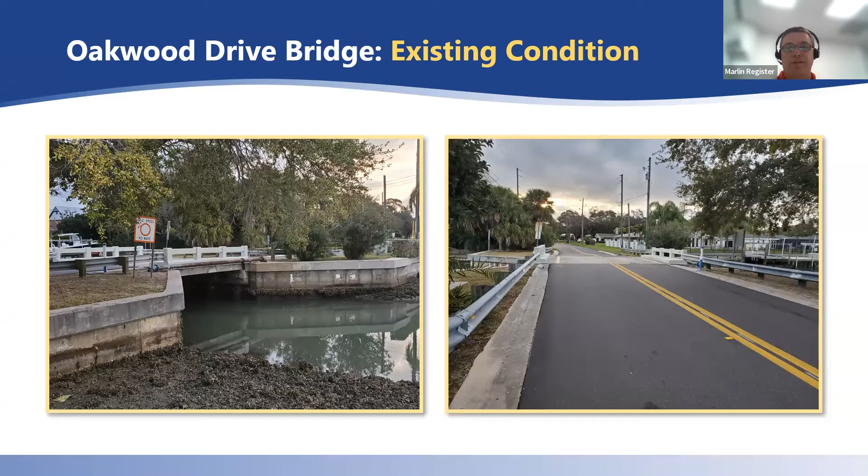Welcome to our virtual neighborhood public information meeting for the Oakwood Drive Bridge Replacement project. My name is Marlin Register, and I'm the engineer of record for the project. The existing Oakwood Drive Bridge is a single-span bridge over Stephanie's Channel. The existing bridge has two 11-foot lanes with no shoulders. There is an existing 2-foot 10.5-inch wide sidewalk on the south side of the bridge.

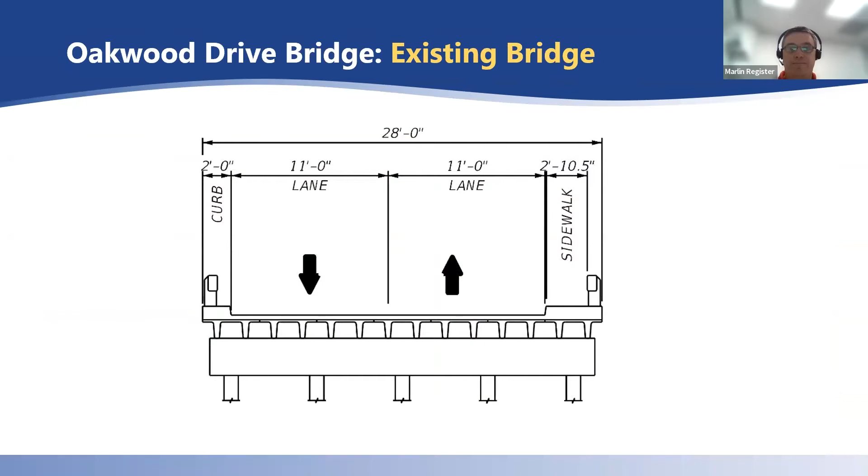Construction of the new bridge will require temporary and permanent relocation of the water, sanitary sewer, and gas lines. This work will be coordinated with the utility owners and performed during construction.

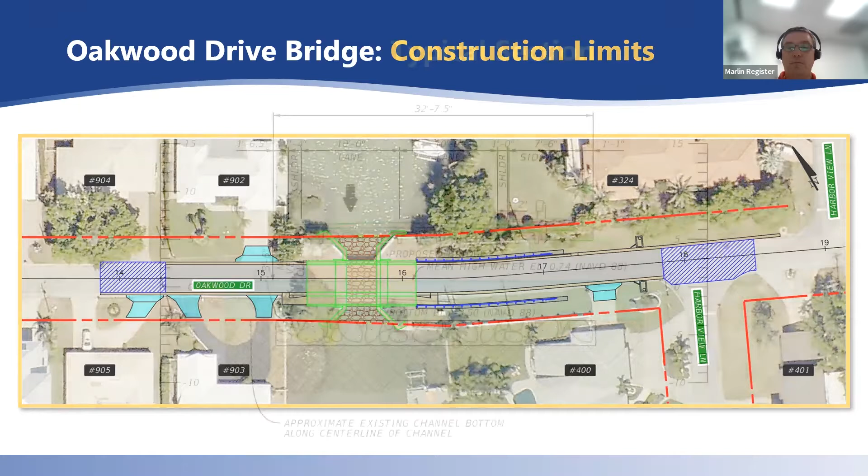The new Oakwood Drive Bridge will be wider than the existing bridge. The new bridge will have two 10-foot travel lanes, a 1-foot 4-inch shoulder on the north side, and a 1-foot shoulder on the south. A 7-foot 6-inch sidewalk will be included on the south side of the new bridge. The bridge low member elevation will be raised by approximately 2 inches, providing a clearance of 3 feet 6 inches underneath the bridge.

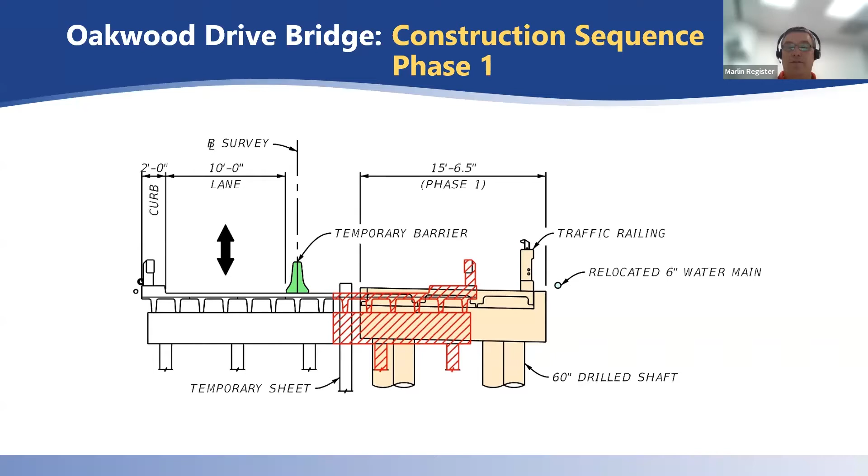In the first phase of construction, temporary barriers are placed closing the southern half of the bridge. Two-way traffic with one direction crossing at a time will be used in conjunction with temporary signals at each end of the bridge. During this phase, the southern portion of the existing bridge is removed and a little over 15 feet of the new bridge is constructed.

In the second phase of construction, the two-way traffic with one direction crossing at a time is moved onto the southern portion of the new bridge constructed in phase 1. Once traffic has been shifted, the remaining portion of the existing bridge will be removed, and then the northern side of the new bridge will be built. At the end of phase 2, most of the bridge construction will be complete.

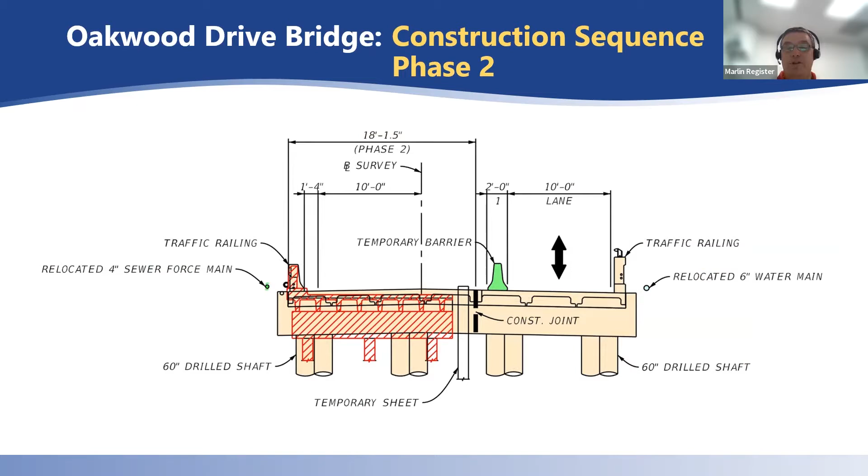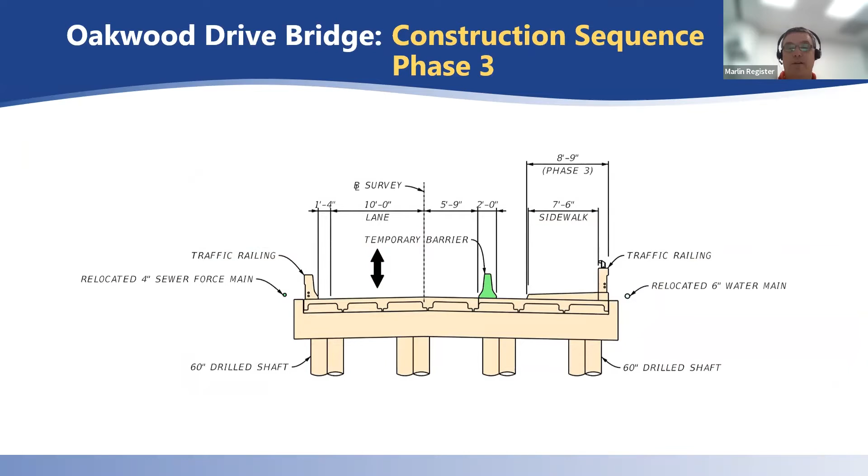In the third phase of construction, traffic will be shifted back to the north side of the newly reconstructed bridge and roadway approaches so the sidewalk can be constructed on the south side. The north side of the bridge will once again carry two-way traffic, with one direction crossing at a time.

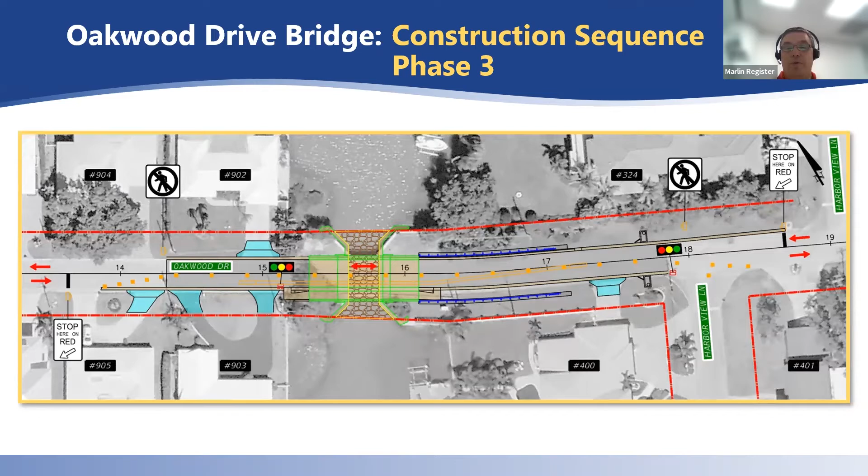Pedestrians will be restricted from using the bridge until the sidewalk construction is complete, the temporary barrier is removed, and traffic is placed in its final configuration.

There is an existing water line that runs across the south side of the existing bridge. This service will be maintained with a temporary pipe placed on the north side of the bridge during phase 1 of construction, before being moved to its permanent location along the south side of the new bridge.

The existing sanitary sewer pipe running along the north side of the bridge will be temporarily relocated to the south side during phase 2 of construction.

After completion of phase 2, the sanitary sewer will be moved to its permanent location along the north side of the new bridge. There will be no service disruptions to the sanitary service, and only short nighttime disruptions to the water service to connect the new water lines.

The overhead utilities will be moved out of the way of the bridge construction as construction progresses.

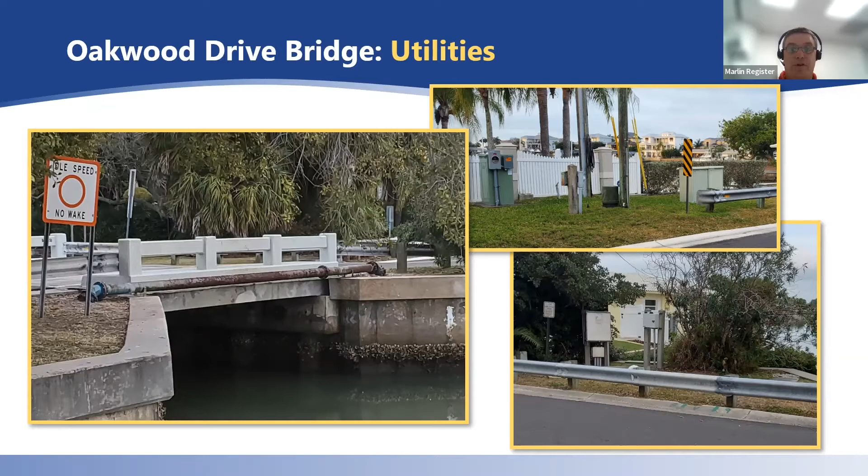Hello, everyone. I am Wesley Merritt with the Construction Management Division of Pinellas County Public Works. I am the construction project coordinator and will be working closely with the contractor, American Empire Builders.

I'm going to talk to you briefly about the construction schedule and some of the inconveniences we will need to get through while the new bridge is being constructed.

The community impacts fall into four main categories: traffic, canal navigation, water service, and construction noise. I would like to be able to tell you exactly when every step will occur, but there are many variables in a project like this that can affect the schedule. Even so, I can give you a basic idea of what to expect during the project.

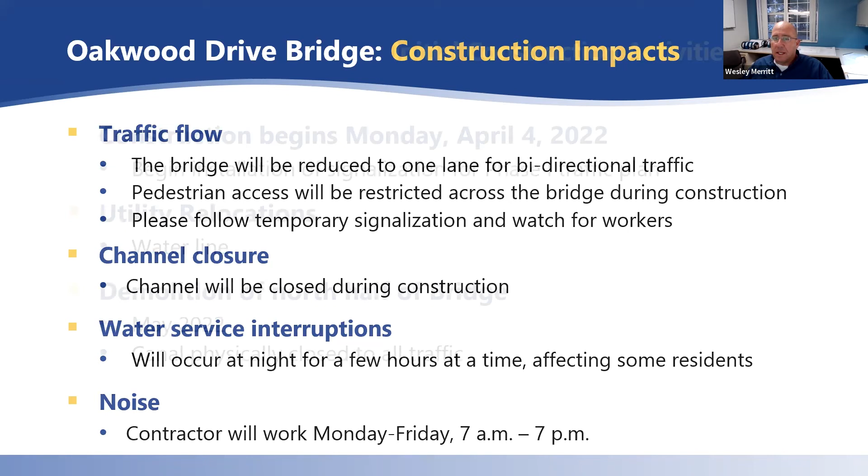Construction is scheduled to begin on Monday, April 4th. At that time, the contractor will close the canal to boat traffic and the bridge to pedestrian traffic, while reducing the bridge to one lane.

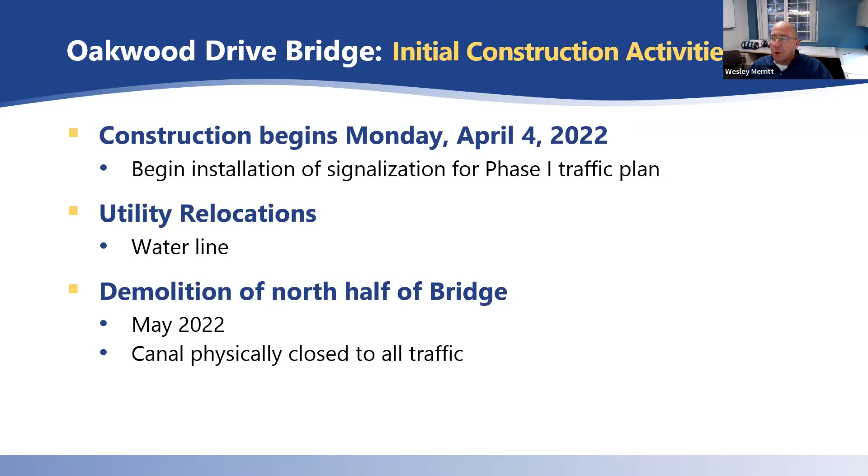Notifications for this closure will be posted in advance on the project website and sent out through a text alert system.

The first phase of construction will be the installation of a temporary signalization and barriers for the traffic switch to one bidirectional lane. This means only one lane will be open at a time over the bridge. Temporary relocation of the Pinellas County potable water line will follow.

During this phase of construction, there will be some disruption of service for the potable water, and this portion of work will be performed at night. All affected residents will be notified with door hangers 48 hours in advance.

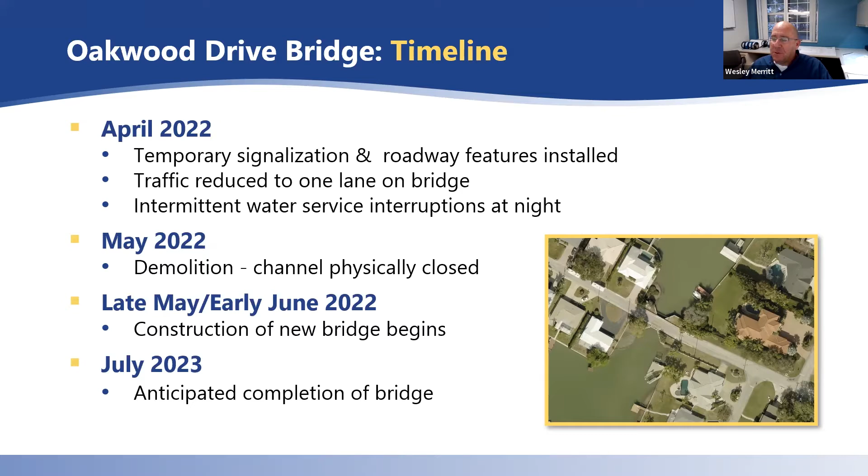Next, the contractor will begin construction demolition on the north half of the existing bridge structure. The construction of the new bridge will begin late May and last through July of 2023. Updates during construction will be posted on the Pinellas County website.

I mentioned noise in the beginning. Obviously there will be construction noise associated with this project, but it will be limited. The contractor cannot perform work before 7 a.m. or after 7 p.m. on weekdays without permission from Pinellas County, and cannot work on weekends or holidays without permission either.

Should the contractor be approved for work on the weekends, a text alert will be sent to the residents. The payoff at the end of this project will be a new bridge that will be a dramatic improvement over what you have now, and we expect the entire project to be completed by July 2023.